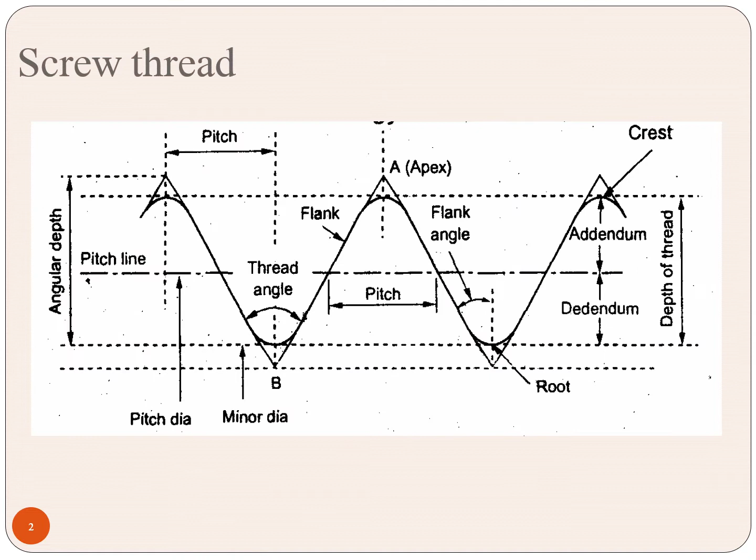In this slide we are looking at the thread, which has the flank angle, that is the angle made by the thread, and also we are looking at pitch diameter, that is an imaginary line drawn within the pitch circle, called pitch diameter.

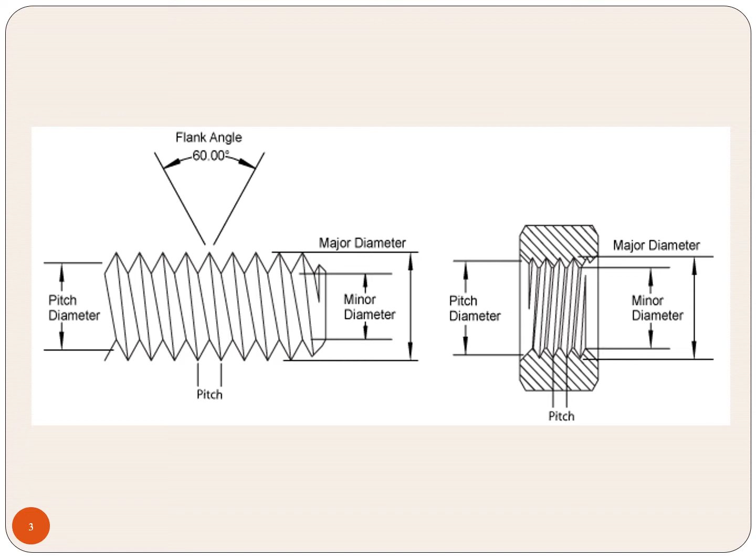Pitch is the distance between two crests of the threads. Major diameter and minor diameter, and the pitch of the thread also we are looking at in this picture. The crest is the top surface joining the two sides of the thread.

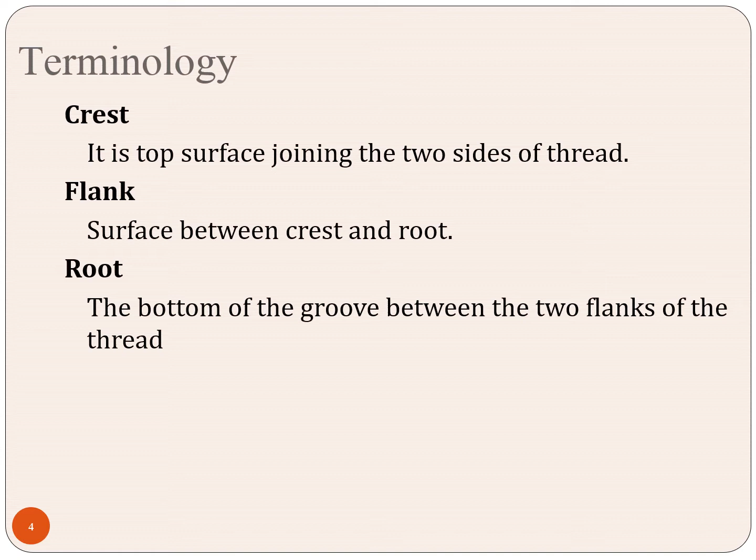The flank is a surface between crest and root, that is a side face, a joining surface between crest and root. The root is nothing but a groove, the bottommost part of the groove between the two flanks of the thread.

Pitch, as we have seen, is the distance measured parallel to the axis from a point on the thread to the corresponding next point, that is the distance between two crests. We can say it is the pitch between two threads.

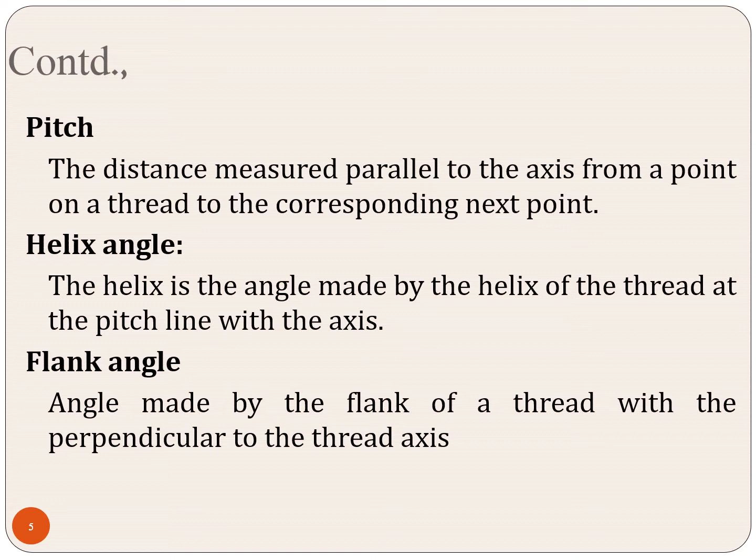Helix angle is made by the helix of the thread at the pitch line with the axis. Flank angle is the angle of the thread with the perpendicular to the thread axis. Depth of the thread is the distance between the crest and the root of the thread.

Major diameter is an imaginary coaxial cylinder which would touch the crest of the external or internal thread. Minor diameter is nothing but the core diameter, an imaginary coaxial cylinder which would touch the roots of the external or internal thread.

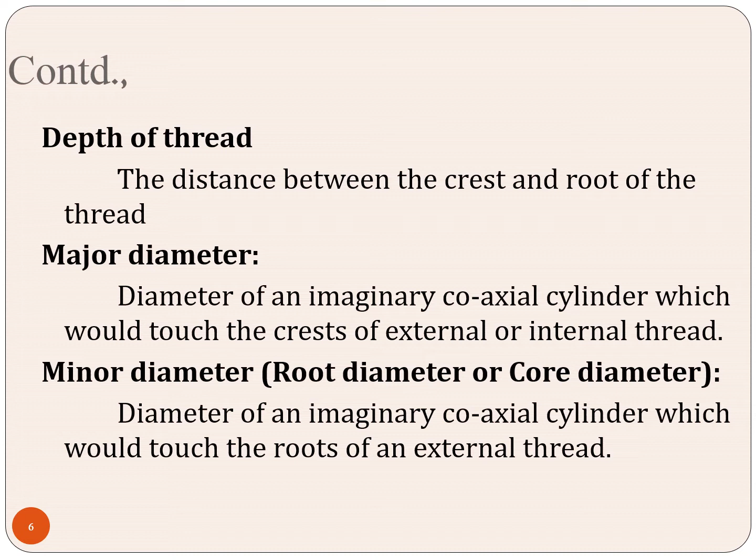Addendum and dedendum are two important terminologies in screw thread as well as in gears. In the next topic we will be seeing gears, where we will also come across addendum and dedendum.

Addendum is the radial distance between the major and pitch cylinders for external thread, that is major diameter, and the radial distance between minor and pitch cylinder for internal threads; the upper part is called addendum, and half of the upper part is called addendum. The bottom half part is called dedendum, the radial distance between the pitch and minor cylinder for external thread.

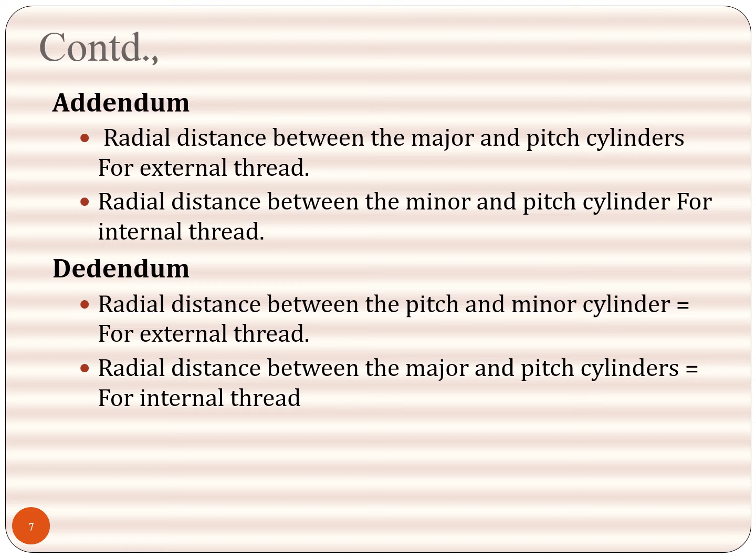Here we will not get any confusion. If you look at the thread, the top of the threaded portion we can call addendum, and the bottom half of the thread we can call dedendum. No need to get confused over this.

Errors in screw thread: yes, whenever we are doing machining or measuring, we will come across some errors. Error may be caused by the measuring tools, the manufacturing machine tool, or by operators. So there are many possibilities for error to occur in screw threads.

The major diameter error is a reduction in the flank contact. That is, if the thread bolt and nut are mating, there may be a gap, which is called major diameter error.

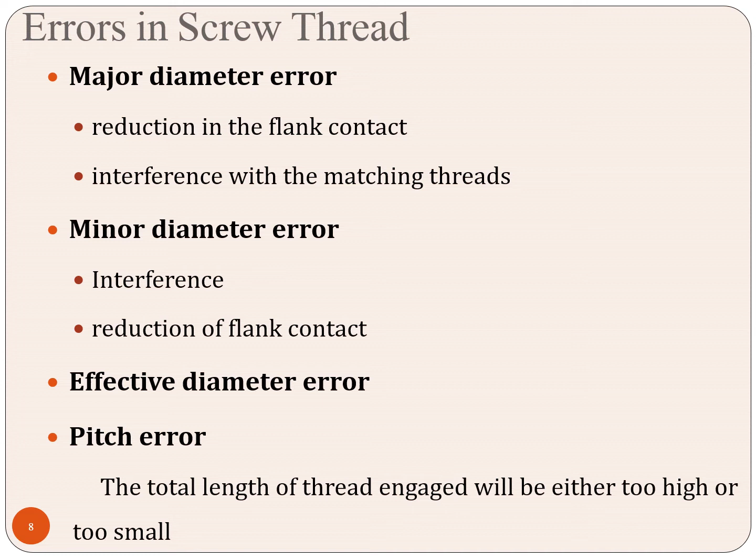Pitch error is when the total length of thread engaged will be either too high or too small. That is called pitch error. It can be classified as progressive, periodic, drunken, and irregular error. We will see one by one.

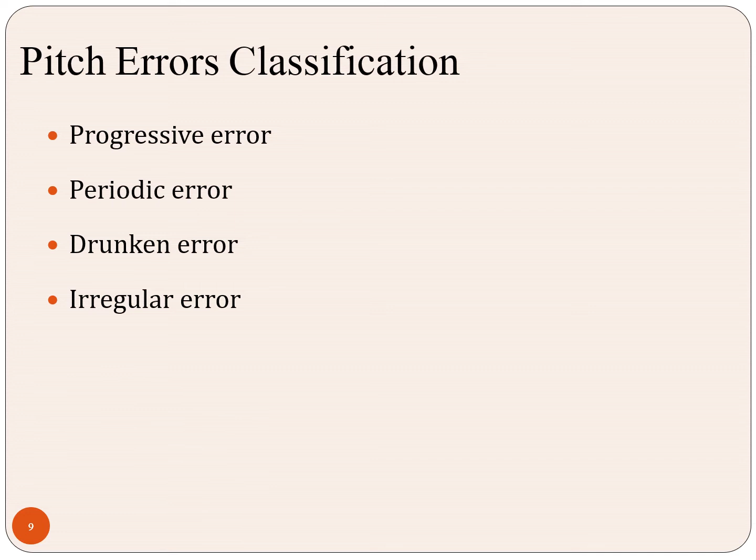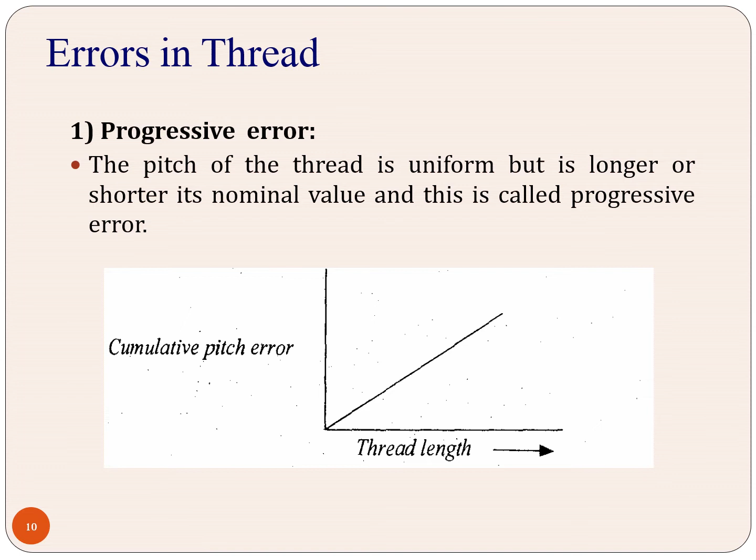In progressive error, the pitch of the thread is uniform but is longer or shorter than its nominal value. It is called progressive thread error. Likewise, we have different types of threads.

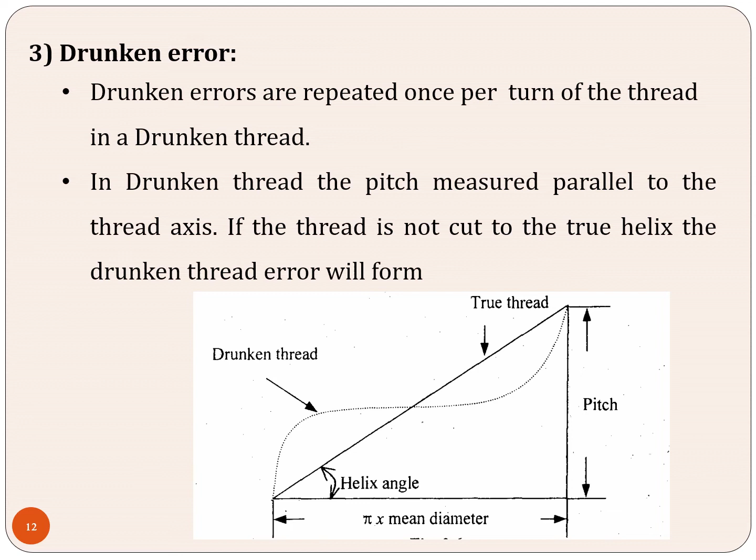Drunken error: errors are repeated once per turn of the thread in a drunken thread. If the thread is not cut to the true helix, then we get a drunken thread.

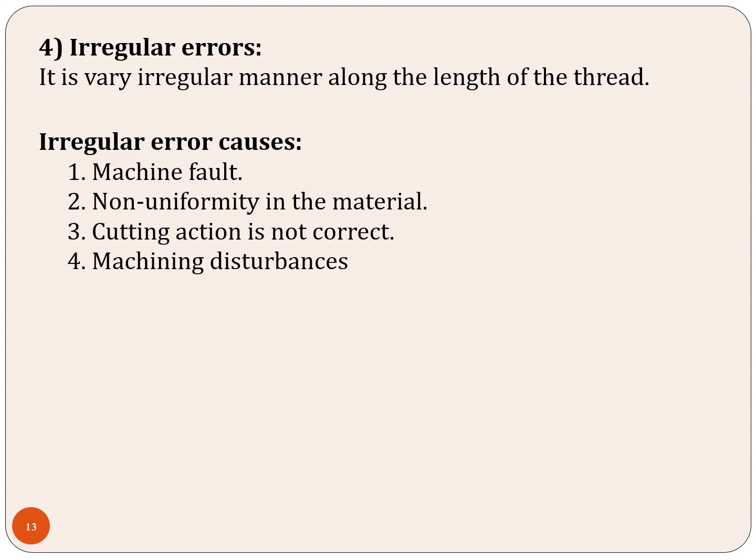We can measure the various elements of a thread like major diameter, minor diameter, pitch, thread angle, and form angle.

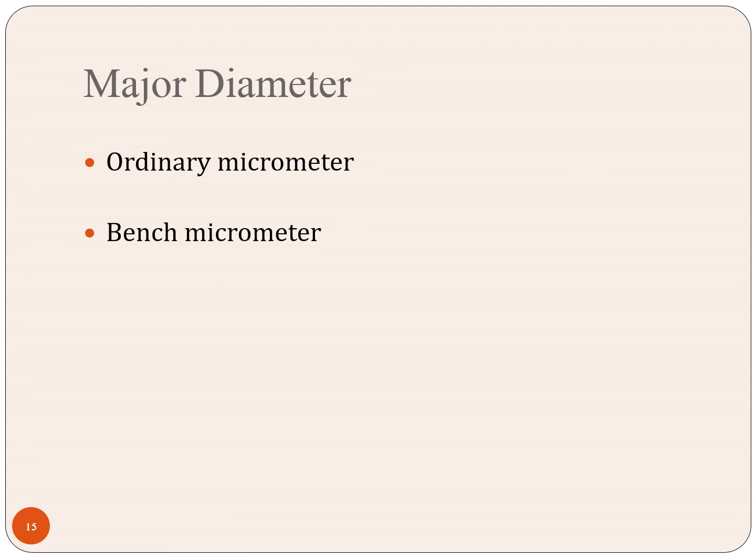Major diameter can be measured by means of an ordinary micrometer and a bench micrometer. These are the two instruments used for measuring the major diameter of the thread. Now we are looking at the bench micrometer.

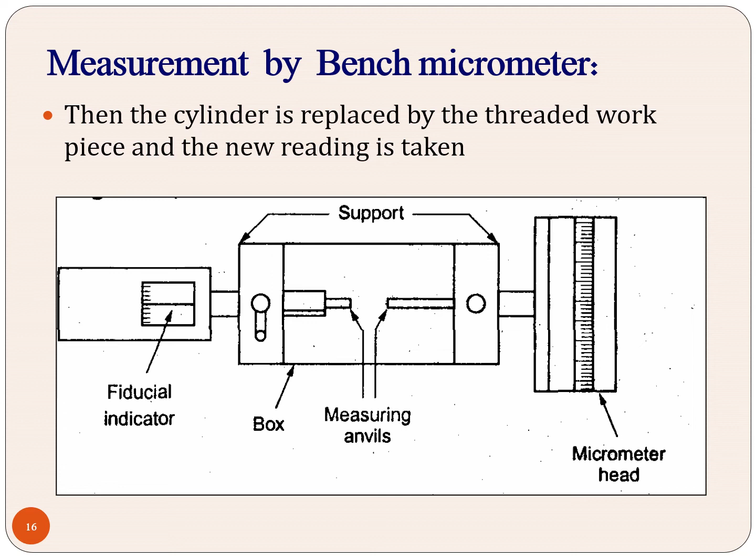The cylinder is replaced by the threaded workpiece and the reading is taken. The cylinder will be removed and the thread screw will be fitted between two measuring anvils. As we see in the diagram, the part to be measured is placed between the measuring anvils.

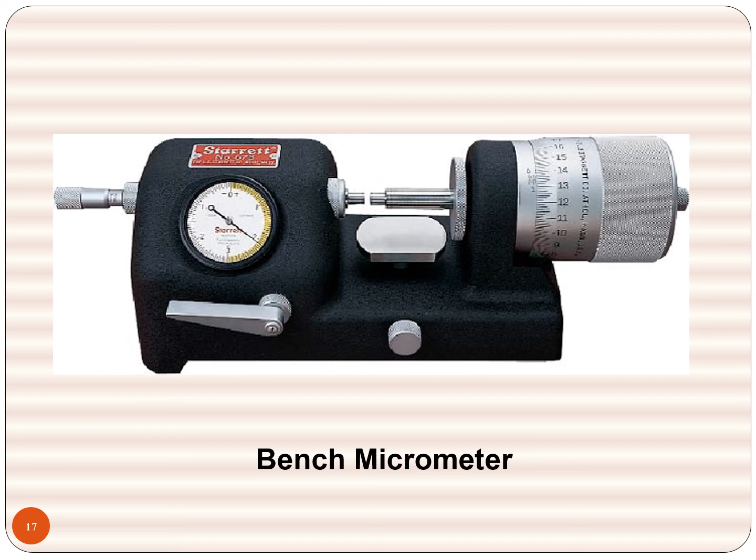This is the diagram of the bench micrometer. Here we fit the threaded portion - the object or specimen we are going to measure - and we can take readings from the dial as well as the micrometer main scale. More clarity can be found here by comparison with the previous slide.

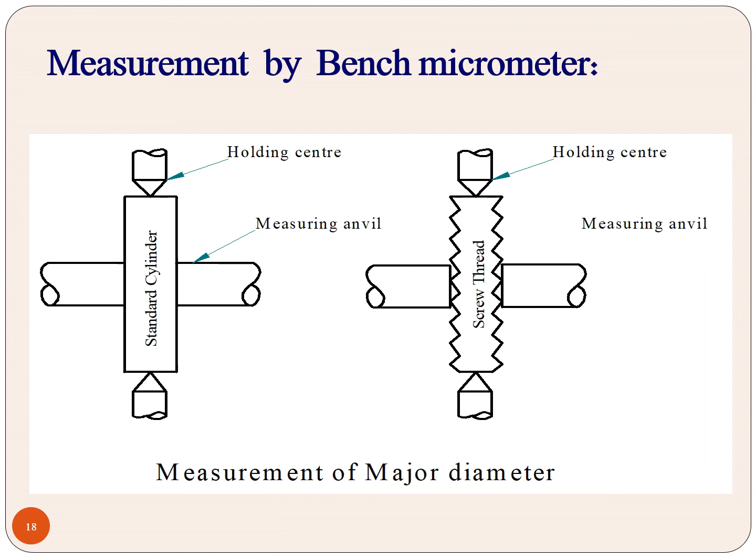Now look at this - how we are measuring the major diameter. We can use a simple formula.

Diameter of the setting cylinder: initially we put the cylinder, then we remove the cylinder, then we put the specimen, that is the workpiece. First we put the cylinder, second we load the workpiece. The cylinder diameter is called capital S.

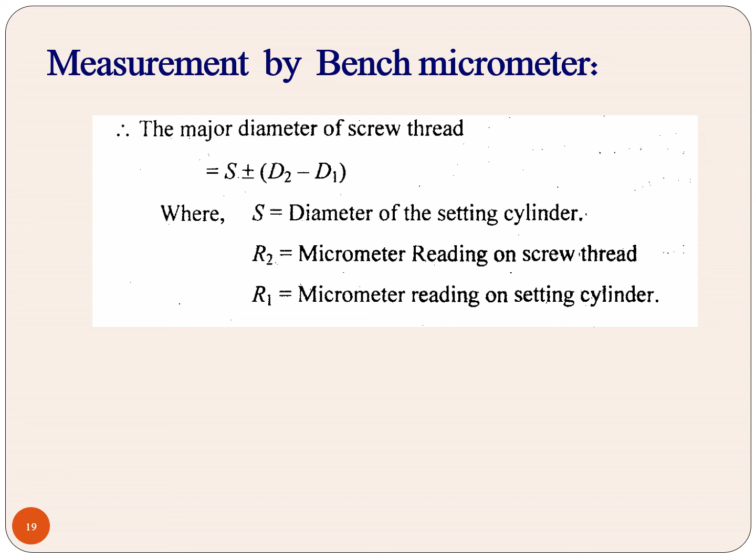Micrometer reading of the screw thread is R2, or D2. The difference between diameters or difference between radius are all the same. The micrometer reading on the setting cylinder will give the major diameter of the screw thread.

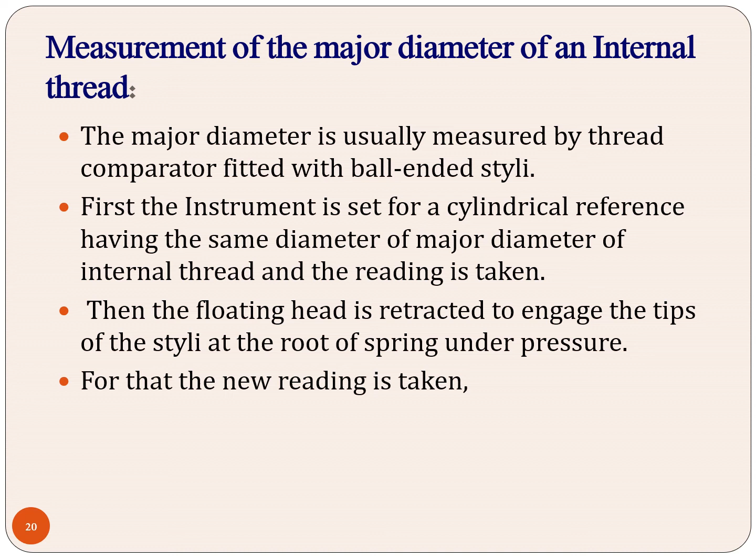For internal thread also we can do it in a similar manner. The formula is the same: cylinder diameter, thread reading, and dial indicator reading on the standard.

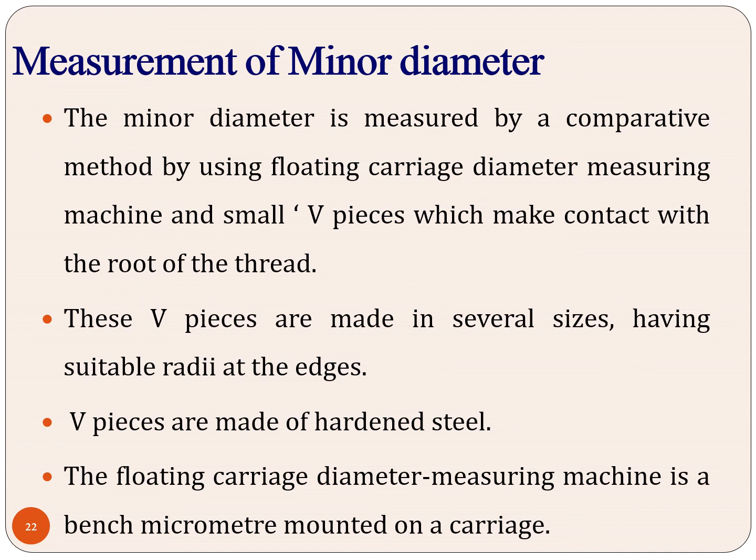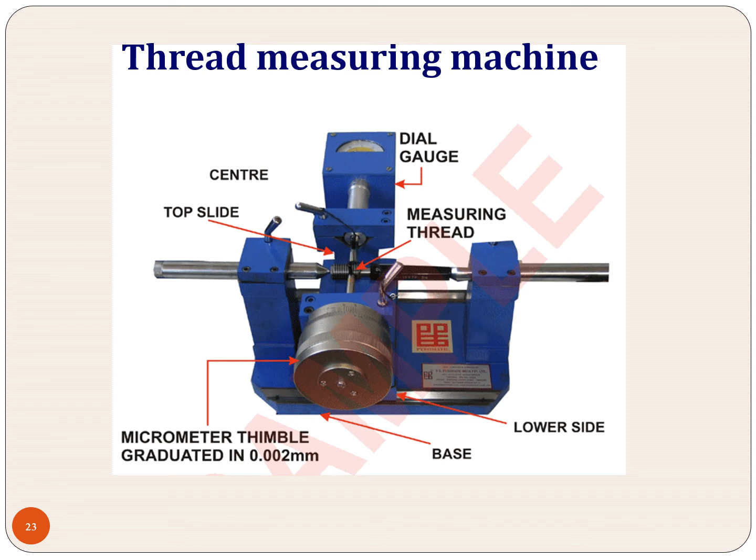This is another type of internal thread measuring instrument, that is the thread measuring machine. These are various types of thread measuring machines.

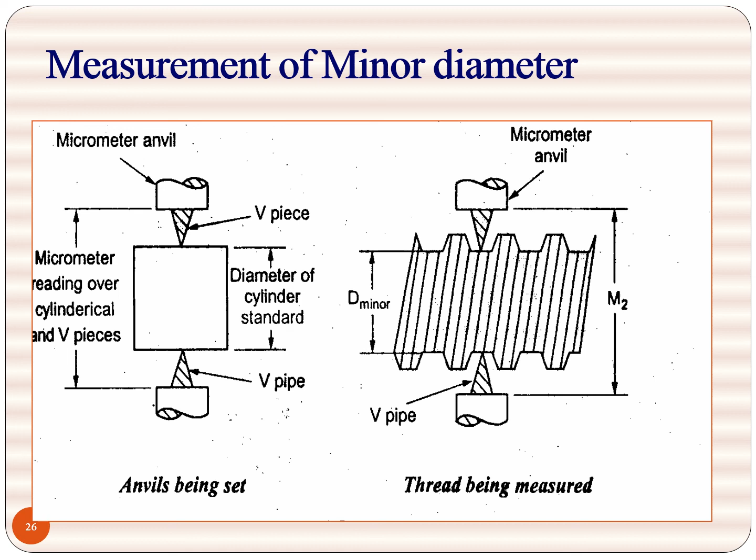The minor diameter, if you look at it, is the lowermost diameter where the depth of the thread at the bottom of the thread is called the minor diameter of the thread.

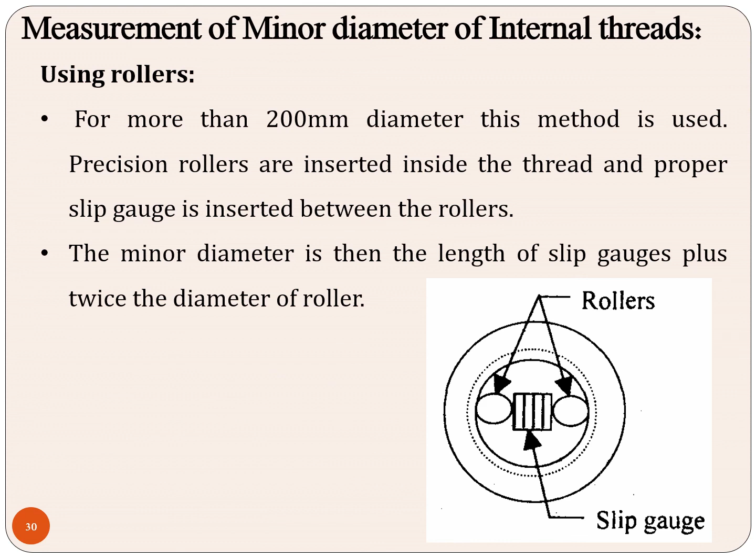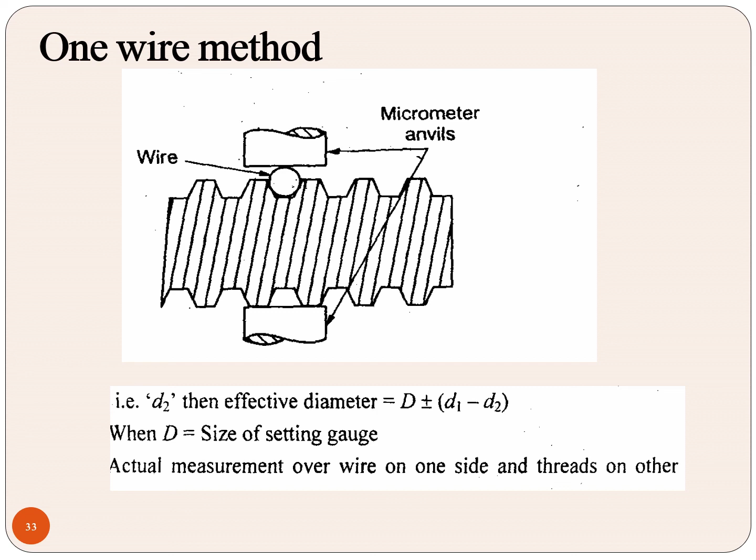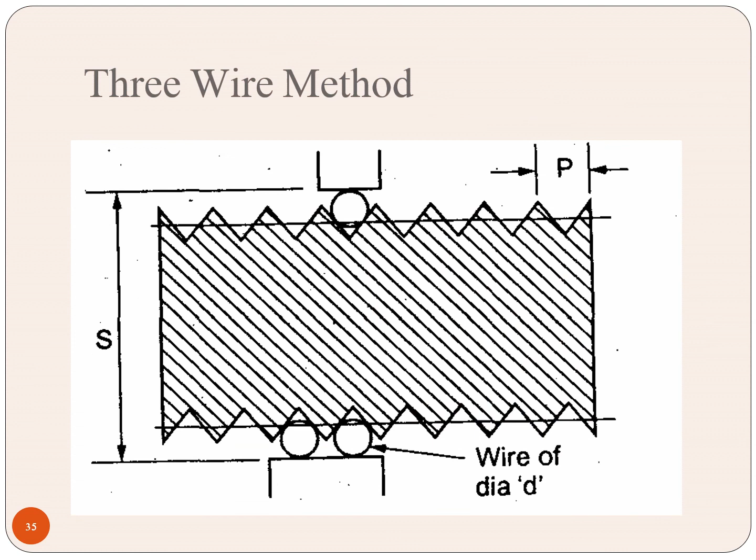That is the one wire method. Here we put the wire over the gap in the flank and fix the micrometer anvils. In the two wire method, wires are fixed in both the upper and lower parts. In the three wire method, two wires go in the lower part and one wire in the upper part.

Here we are seeing the three wire measuring method of thread diameter.